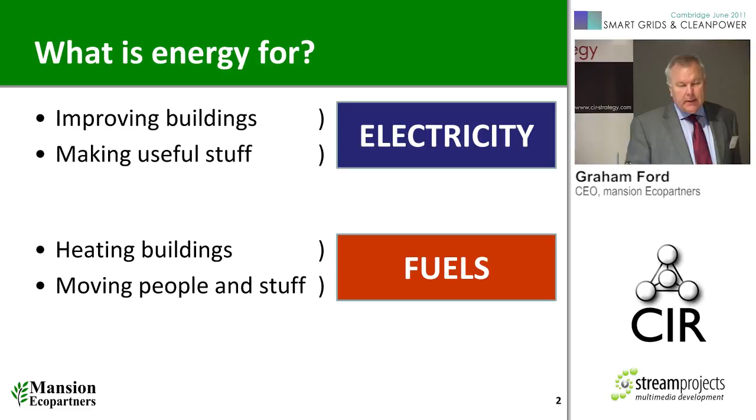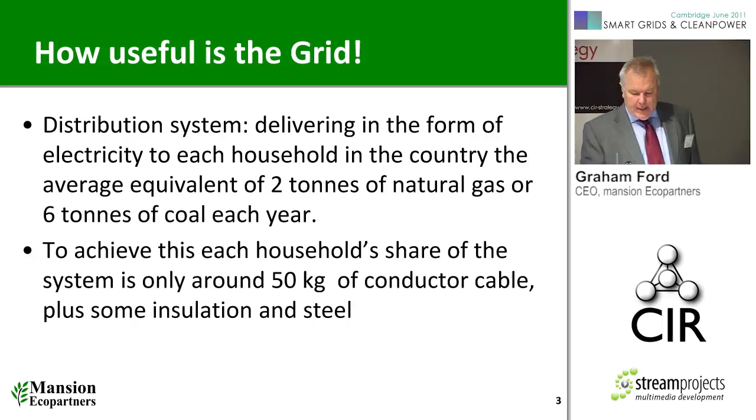The question is, how much will our electricity take over from what we use fuels for, and to what extent will fuels be manufacturing our electricity in the first place? The grid is terribly useful. For example, it delivers roughly to each household and its equivalent jobs about the energy equivalent of 2 tonnes of natural gas or 6 tonnes of coal each year. And it does so using no more than a fixed investment of about 50 kilograms of conductor cable plus a bit of steel to hold the cable up and a bit of insulation in the last few kilometres.

However, there are worries, lots of worries, but they really come in three categories. The first is that the grid is astonishingly wasteful in the sense that 50 to 70% of the fuel energy that goes in is wasted. And with our network of large remote power plants, which were built that way because of their efficiency, it's not possible to use them realistically for combined heat and power. And anyway, in this country, we don't have the cold winters that, say, Scandinavia has, so there's never really been a strong argument for combined heat and power.

Secondly, grid failure, as Ted Heath discovered, was much more costly than grid expansion. And that perversely makes demand reduction very difficult. You have a few generators, millions and millions of consuming devices. Getting the power back down again is a tough call. And thirdly, generation systems of all types put life, property and biosphere at risk. Life is put at risk if, for example, your renewable energy system fails to keep the lights on. Your coal-fired power plants are effectively putting the entire biosphere to some degree of risk. And lastly, but for a fortunate wind direction, Fukushima would have resulted in probably the biggest public health catastrophe in the world's largest capital city.

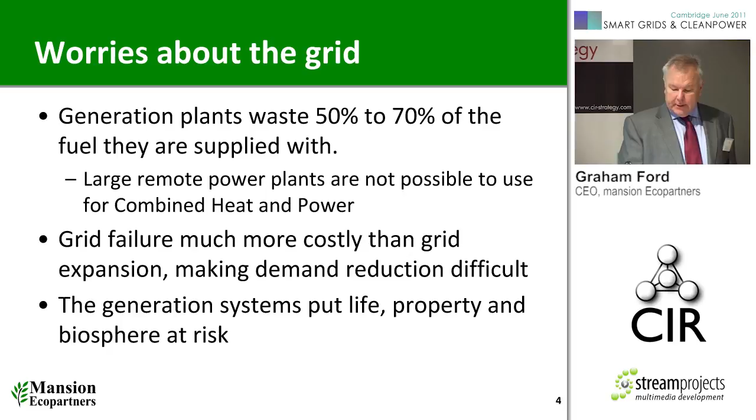So we need a better grid, and we need it soon. What are the elements that we're really looking for? We need much greater fuel efficiency. Whether that comes about by renewable generation or by other means is secondary. What we have to have is greater fuel efficiency, both for economic reasons as well as for carbon reasons. Secondly, we need a mechanism, ideally a price-driven mechanism, for controlling demand. We can't go on willy-nilly expanding supply in order to keep the lights on. There has to be an incentive to deal with the more difficult problem of figuring out why we use the energy we do. Then we need to reduce the risk of our generation systems.

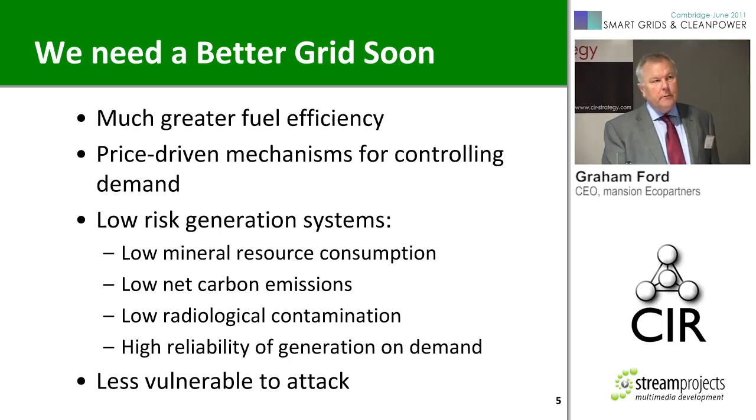It is no longer acceptable for any of the generation industries to hide behind the fact that it is difficult to bring them to book when they drop the ball. So we need generation systems which remove the supply risks: low mineral resource consumption, whether that mineral is a petroleum or a critical metal. Secondly, we need low net carbon emissions, obviously. Thirdly, we need low radiological contamination, and of course I'm not talking about the normal run-of-the-mill, I'm talking about accidents, etc. And lastly, we need high reliability of generation on demand. The danger with renewables is that we increase that risk enormously, with the result that we have no net benefit. And lastly, it would be very helpful if the grid was far less vulnerable to attack.

So, the question we have to ask ourselves also is, can the grid do more? We would like the grid to be heating our buildings, either with CHP or with heat pumps. The problem with both of those at the moment is that the efficiency gains are rather modest. We would like our grid to take over the job that we currently leave to oil. We'd like it to move people and stuff. For cars and trucks and obviously trains, that's quite probable. Ships and planes, no.

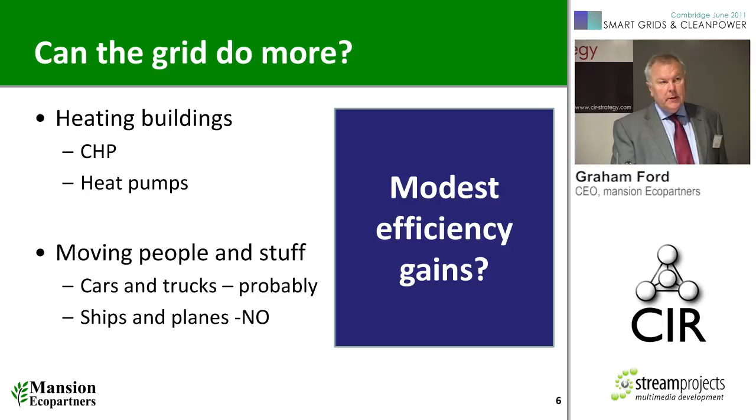So, let's start by asking, where does our energy come from at the moment? I want to simplify the discussion, so we're not going to have large spaghetti diagrams. We're just going to try and keep it simple. For every household in the country, including their equivalent spend in the world of work as well as at home, they use about 4 kilowatts of oil, about 4 kilowatts of natural gas, about 1.6 kilowatts of coal, a little bit of nuclear, far less renewables. Most of that either goes to heat, which one can argue is a form of waste simply because we didn't insulate our buildings properly in the first place, or it goes to make some stuff, but most of it is wasted.

The net result of that is about 800 watts of power that runs our transport. These are average figures, of course. 800 watts of gas power to contribute to the grid, another 400 watts from coal, another 300 watts from nuclear, and a terribly small amount from everything else at the moment.

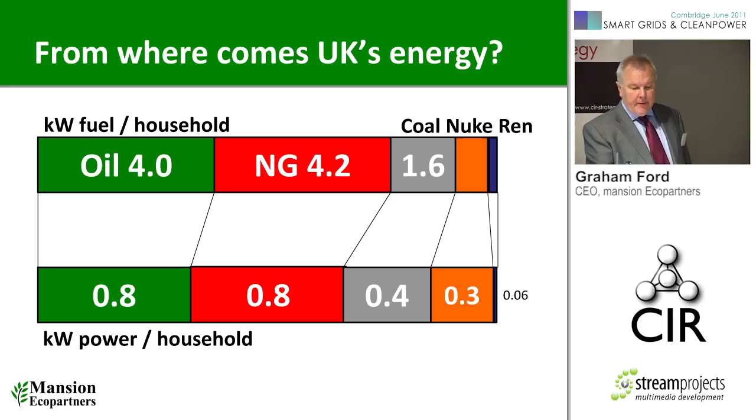So, what are the elements of a better grid? And now we come to the heart of it. I believe the key is to sort out the heat problem. As a result of a piece of work that we did in the solar field, we suddenly realized that this read across into the UK situation. That is seasonal geothermal heat storage. Quite practical, turns out to be quite cheap, but you have to do it fairly locally, on a scale of about 1,000 to 10,000, maybe 100,000 homes.

We need local power plants, CCGT power plants, to feed heat into that geothermal storage in the summer, as well as the winter, of course, so that all of that heat is available to run district heating. The cost of district heating, implementing it nowadays, is actually cheaper than it was because of advances in materials. It needs to be natural gas fueled with an option to fire with liquid biofuels so that there is less supply risk.

Coupled with seasonal natural gas storage, that should reduce the supply risk further. So when Russia decides to have another spat with the Ukraine, we're not left in the dark and the cold. And lastly, it needs to have a capacity such that it can electrify transport, but that transport will have to run rather slower and rather lighter to be affordable.

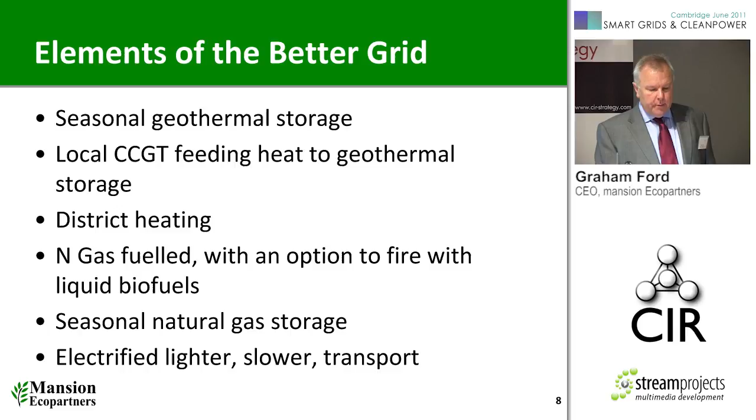Alongside that, we will need demand management, and that demand management not only has a control aspect to it, but also we need to further improve our building stock, lowering the thermal mass of the buildings as well as insulating them, because most residences are not heated continuously, and that fact is not reflected in the current building codes. We need to eliminate silly appliances like storage heaters.

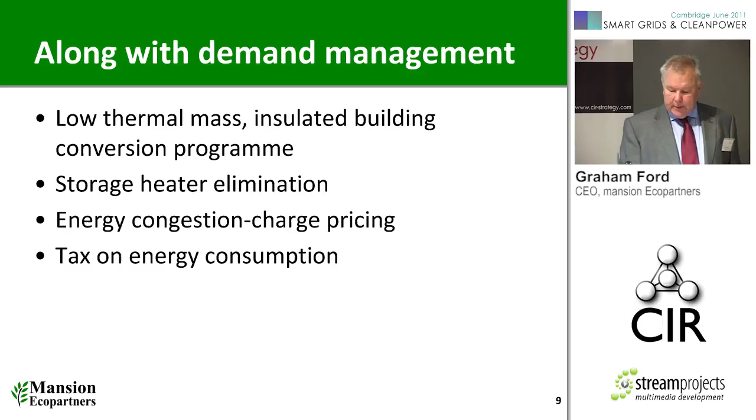We need to include within the smart grid aspect what I call congestion charge pricing. And lastly, we need appropriate taxation on energy consumption so that it always features in people's thinking. So what does the resultant fuel profile look like? Our rather simplistic study suggests that we're going to approximately halve or more the amount of fuel that we use in order to generate a little more electricity than we currently consume.

There is an expanded role from renewables, as per the current plans, but not excessively so. Nuclear, we've taken the assumption that it will not expand, but neither will it contract. All of the other fuel uses go down, but their outputs remain roughly the same. And you can flex how much natural gas, how much CCS, how much oil, or how much bioliquids you put in there according to market situations.

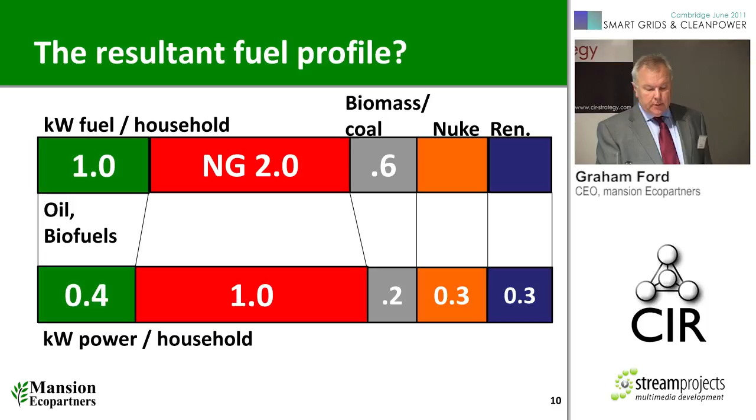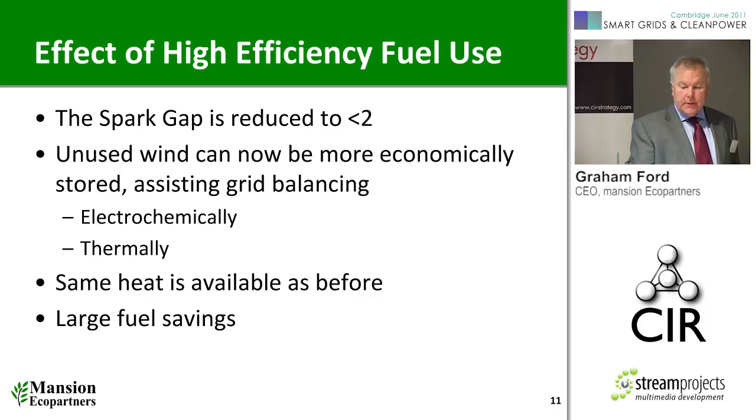The effect of this is it reduces the spark gap, the difference between the cost of electricity and the cost of fuel. And that means that unused wind, and there will be more and more unused wind, can now be more economically stored, assisting grid balancing. It can be stored electrochemically, it can be stored thermally. My preference is thermal. The same heat is roughly available as before. There has been some improvement in the model in the amount of insulation in our buildings, but not excessively so. But the result is large fuel savings.

We need a UK-based supply chain that encompasses what's needed for seasonal geothermal storage. The technology exists. What's needed to implement a district heating system, and for economy, that will be a plastic-based, not a metal-based system. Obviously, we are going to electrify transport. We have to find a way of having a share of the battery market. And it seems a big hole in our industrial infrastructure at the moment that we don't.

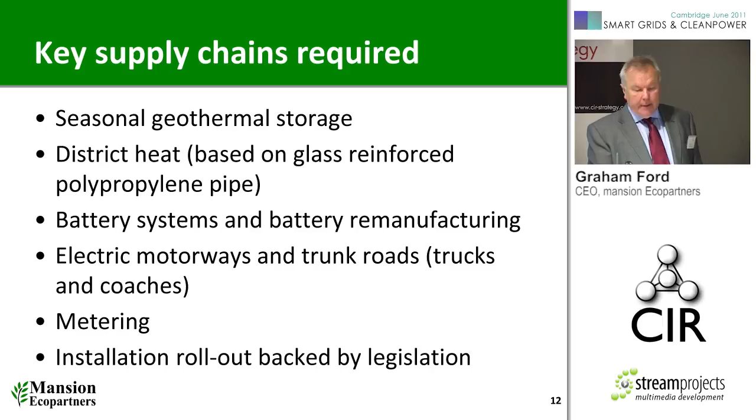We should think about electrifying our motorways and trunk roads for our heavy vehicles, because that's the most efficient way to do it. We obviously need to upgrade the metering, the subject of yesterday's conference, and we need an installation rollout that's going to have to be backed by legislation as well as by market pressures. But the overall benefits are major.

60% reduction in fuel use, much lower net carbon emissions, no expansion in nuclear, sorry, but I regard that as a benefit, a multi-fuel capability to reduce our fuel supply risk. It uses gas turbine technology that is responsive and which, hey, we make. Thank you, Rolls-Royce. It's cheap to add the capacity. The capital cost per kilowatt of this is potentially nearly an order of magnitude less than some of the schemes being proposed.

It places our critical generation close to the centres of consumption, which makes the grid less vulnerable, and ultimately gives us a pathway to biofuel substitution for the fuel that we do use a few decades down the road, but one can see cellulosic biofuel liquids making good progress.

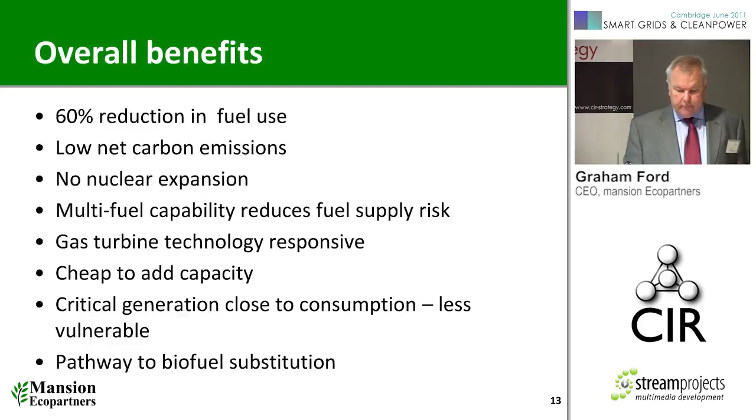And in the future, the long future, which is where we came into this as a company, concentrating solar with seasonal storage greatly improves the long-term reliability. It would allow, for example, India to generate its electricity and get through the difficult monsoon period. Combined with a supergrid, and now we really are talking into the far future, it could eventually eliminate fossil fuel use entirely, as well as allow us to expand a global energy infrastructure.

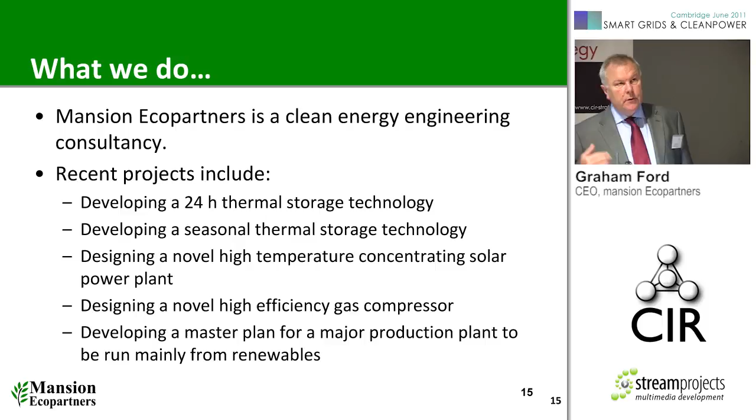So we're a clean energy consultancy, but the reason for giving this talk is really to try and develop a coalition of the willing, to see whether there's a community of interested parties willing to promote this concept and to bring it to fruition.